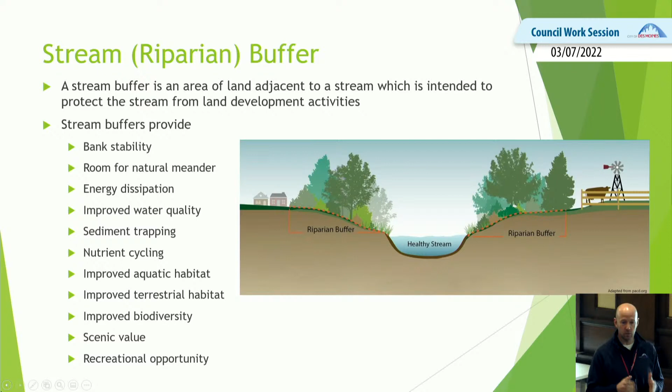So the first thing is, I'll just use the arrow key. So the stream buffers provide a whole host of benefits. We know that the creek is more than just where the creek currently is, because water will move over time in a way that is incredibly difficult to manage.

We have 21 miles of levees in downtown Des Moines to contain the river to where the river goes now, but that's simply not practical to do over the 200 miles of creekway that run through the rest of the city. And as water moves over time, it's going to go pretty far and wide in the space that Mother Nature has provided for it.

And that can happen not just on the big rivers, but even on the small ones too. This is an example of very carefully documented meandering of a stream on a 100-mile watershed that's smaller than 4 Mile Creek. So even over the course of a couple decades, a stream as small as 4 Mile Creek will move quite substantially over time.

You see the oldest date there is 1924. We've got a lot of development in Des Moines that is older than 1924 and would expect to see this much meandering, if not more, on even some of our medium-sized streams.

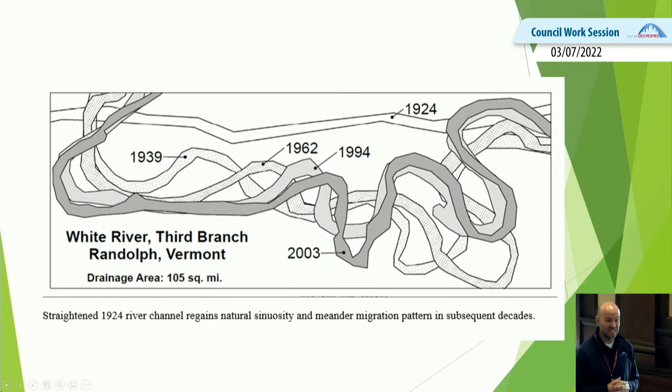So the idea of the buffer is to limit what can happen when that water moves. If you have a stream out in the middle of nowhere, it's like the tree falling in the woods—does anyone hear it? We don't really care quite as much, except when our yards start backing up to those properties and we start seeing instabilities develop, and erosion continues.

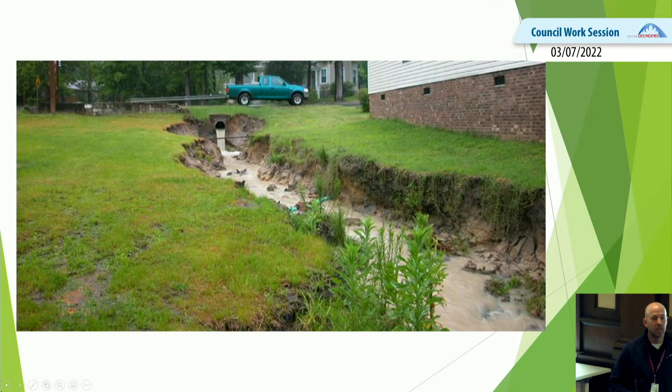Anytime you see a 1 foot or more sheer face of earth next to a body of water, it's going to get bigger. That's an instability, and erosion and natural processes will continue to erode that away.

Is that picture of the city of Des Moines? No, that was from North Carolina. All right, just example pictures. This one is not either, thankfully.

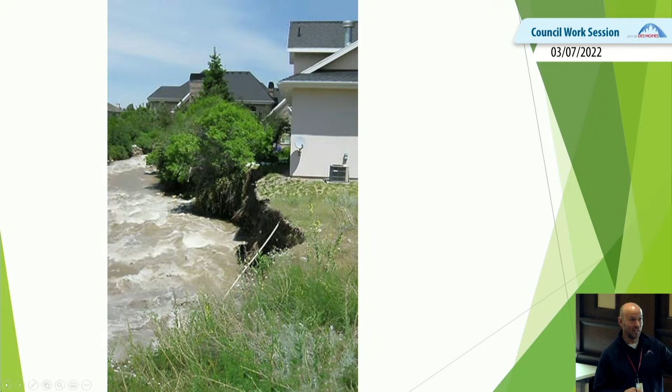But when you've got that much water and that much instability right next to a house, you've got a big problem. So this is going to take some real engineering to fix that one there.

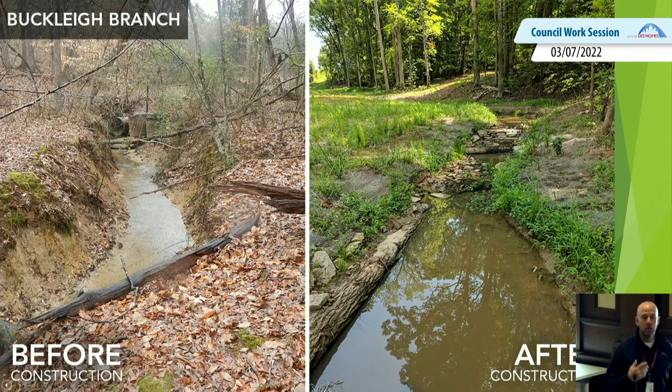But not only do you start impacting properties, but when you started pushing properties and land development activities closer to the creek, you start limiting your options for stream bank stabilization. So here I mentioned the 1 foot or more sheer cliffs next to a waterway is a bad idea.

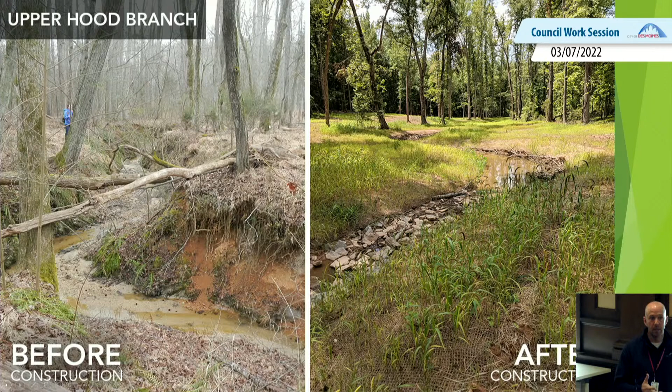As you lay that out and stabilize it, you create more space for the water to safely make its way down and stop eroding and delivering sediment. But when you have land development activities closer to these waterways, you severely limit the options available for stream bank stabilization.

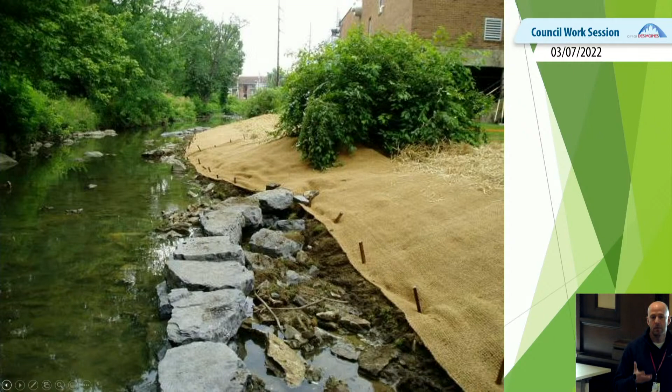That tends to increase the cost or just make it very difficult. So we want to preserve that space in future developments to help prevent some of the worst problems and preserve the toolkit available to the private property owner, to keep their property safe and enjoyable, because a lot of this is easily foreseeable if the engineering is done properly at the very front end of development.

We also want to keep... these are all again examples. There are examples like this in some of the western suburbs, in Clive and elsewhere. These are just examples.

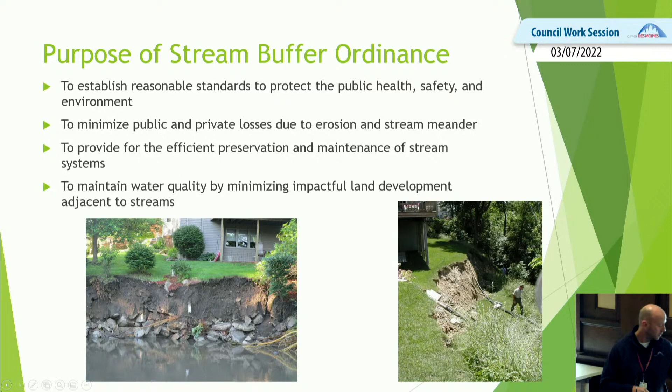So there are existing stream buffer ordinances across the metro. This was not part of the Capital Crossroads Stormwater Management Ordinance that we brought to you all for approval back in November. That's now in effect. There was not consensus at the time to fold this in, partly because there are multiple existing stream buffers and they don't all agree with each other.

So the Walnut Creek WMA member communities undertook this as a separate follow-up activity. We're a member of that WMA, so we wanted to participate and then bring this back for separate consideration later.

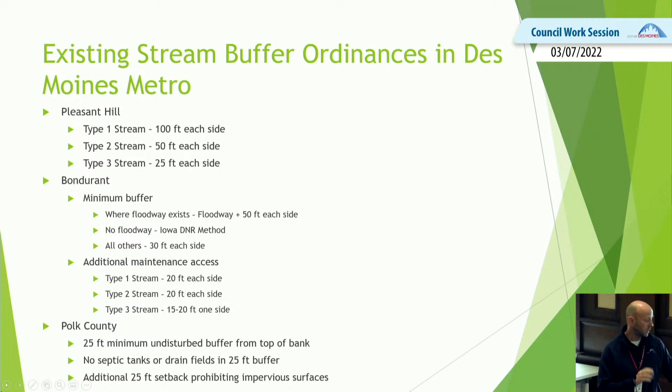So you see multiple references to type 1, type 2, type 3, and the buffer sizes that go with it. Basically, the bigger the stream, the bigger the buffer. There's different ways that buffer is calculated depending on where you live, and what is permissible differs based on the size of the stream in the existing stream buffer ordinances.

Maintenance access—could you describe a little bit about what that entails? For Bondurant, in the second bullet, additional maintenance access.

The maintenance access would be—what's prohibited in the stream buffer is land development activities, which is a more stringent standard than floodplain management. Floodplain regulation basically limits inhabitable structures, so you can build a shed in the creekway, but a maintenance access would make that accessible beyond just the bare minimum of the buffer—accessible to a vehicle or a person walking. So it would preclude the placement of a structure or an object that would make maintenance impossible or more difficult.

I have a question. In some of the pictures you showed, the before and after, there was reconstruction of the banks and everything like that. So would a stream buffer ordinance include us doing that work, or is it just saying we're not going to build?

Not necessarily. The stream buffer ordinance would prohibit land development activity within the buffer. Part of the problem with encroachment into that is it makes stream bank stabilization more difficult to do and limits your options. So it's showing examples of before and afters of unstable banks, and oftentimes you get things right up against a creek bed, and we have sheds and garages where the cliff face keeps eroding in.

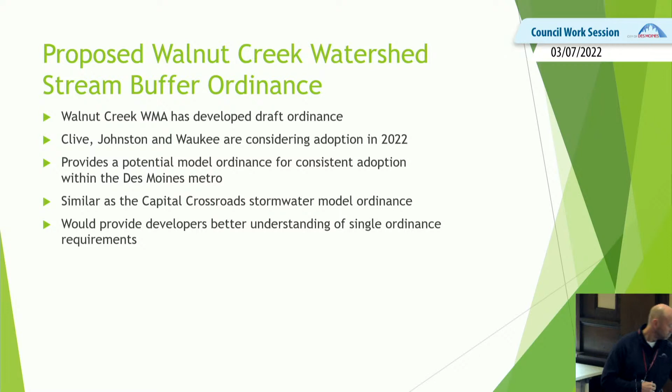So what we're proposing is 3 different kinds of buffers based on the size of the stream, which is driven by the size of the watershed and its contributory area. The type 1 stream is what we're all familiar with.

That's our 4 Mile Creek, Walnut Creek, Middle Creek of the North River along the south side, Frank Creek coming away from the airport. These are your larger waterways that have a defined floodway and are mapped by FEMA on the flood insurance rate maps. The next level up is the type 2.

So those are the ones that show up on the USGS map. The last layer, type 3, starts at 50-acre watersheds or larger at the top of a watershed, and I'll show you an example of cases where a 40-acre parcel at the top of a watershed with no throughput will not have a stream buffer apply to it. So 50 acres or larger, based on our analysis of aerial and topo maps.

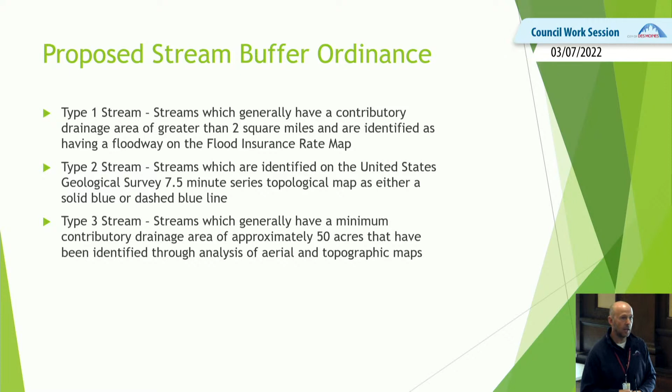Yeader Creek across the south side is a type 2 stream, and there's a whole bunch of type 2 out there. There's 200 miles of creekway inside the city that using the type 1, 2, and 3 method would only apply to 100 miles of those. So half of the waterways are smaller than type 3 and would not have any stream buffers apply to them.

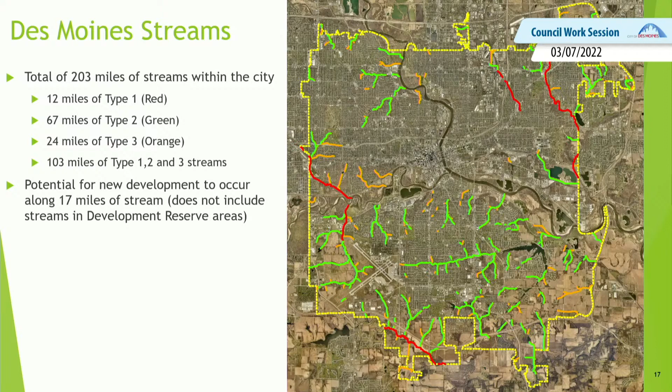Not including the development reserve in the southeast corner of town, there's 17 miles of stream bank that are currently undeveloped, and this would apply from day one at the point of initial land development, were this to be adopted. What about existing homes that are already in the buffer? What are we going to do with those?

What are we going to do with those? Well, this would not apply to streams or current activity that's already been done, so it would only apply to new land development activities. For the most part, that's going to be trying to build a pool or a new garage or a new shed, that would be limited. If there's a legal non-conforming use, that would continue to be allowed in the stream buffer.

So that first layer defines that the area to be protected is the floodway, not the whole floodplain, just the floodway. That's the flat part of the creek, the creek bed adjacent to the creek itself, plus another 50 feet.

And land development activities inside that, that is kind of a common sense understanding of where you absolutely don't want to put something. That's the flat ground right next to the creek where all the meander takes place, so you really don't want to put anything there.

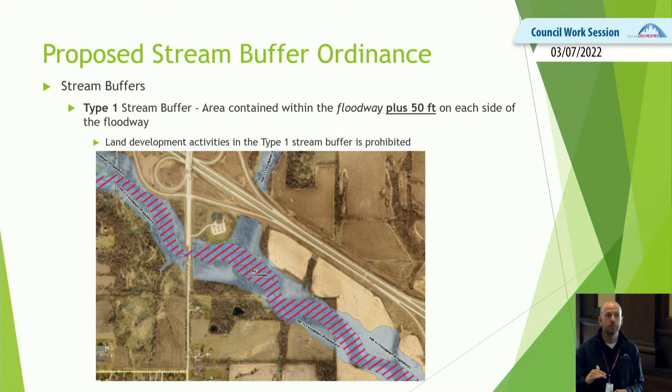This would prohibit any land development activity, which would include clearing and grubbing and cutting down trees and turning it into turf. So we want to preserve that in the most natural state possible.

You'll see here, the floodway is that flat part, as I said, next to the stream channel. So you can currently—

the Chapter 50 floodplain ordinance limits development inside that 1% annual chance floodplain. The floodplain includes the banks. The stream buffer does not necessarily include the banks because it's measured 50 feet out, so it will go up the slope depending on how steep your slope is, 50 feet beyond the floodway.

This is different from, but layered on top of, the Chapter 50 ordinance for floodplain development, because that's a vertical limitation from the 1% annual floodplain, whereas the stream buffer is a 50-foot lateral beyond the floodway. This helps preserve those banks and keep them stable so they can resist the erosive effects of the meandering stream inside that area.

And this is limited to just a few of those red streams shown on the map there, which is 4 Mile Creek, Frink Creek, which is largely undeveloped, Middle Creek of the North River way south, and interestingly, the 7th Ward ditch as it turns into the Leetown Creekway box culvert and then opens back up, running through the east side of town.

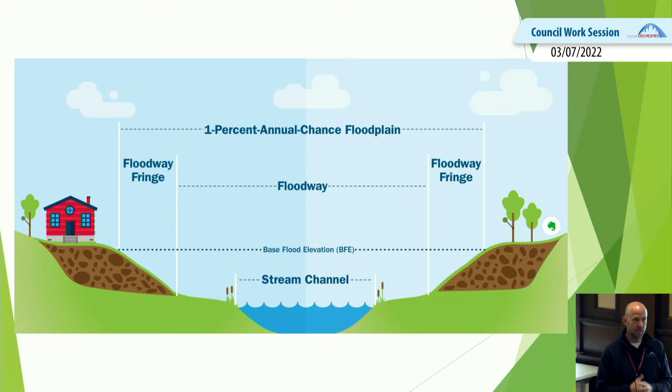Can you explain the floodplain, the vertical, what you said? The 1% annual chance floodplain has an existing limitation for development of inhabitable structures and other things based on vertical elevation. The finished floor of a building must be at a certain height above the base flood elevation, the dotted line shown there.

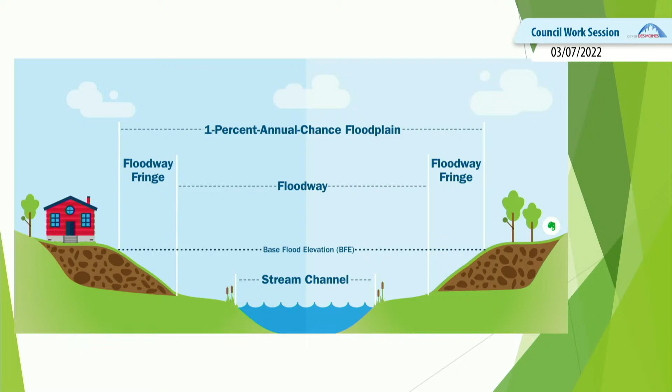That tends to get you further away, depending on the topography. This would set a hard 50-foot buffer from the floodway, the white line of the floodway, stretching out horizontally. So the two would work together to keep land development sufficiently high to protect it from floodwater, and sufficiently far away to protect the vegetated natural state of the creek bank and adjacent areas.

Okay, that makes sense, thank you. So we're taking 50 more feet from the floodway line? I'll show you what that looks like in most cases. In almost every case that's a one-to-one, there's an overlap - the floodplain is larger than the 50 feet. It's not the furthest white line, it's the inside white line. So this is already 50 feet here, in most cases, yes. We'll have some example maps to see what that looks like.

But it does further restrict what can happen inside that 50-foot buffer, inside or adjacent to the floodway itself, by preventing all land development activity. Some of that is permitted now under the floodplain ordinance, as long as the finished floor of your occupied structure is high enough. We presently permit a lot more activities in that riparian space than a stream buffer ordinance would. This really fences off from future land development activity anything in that buffer space.

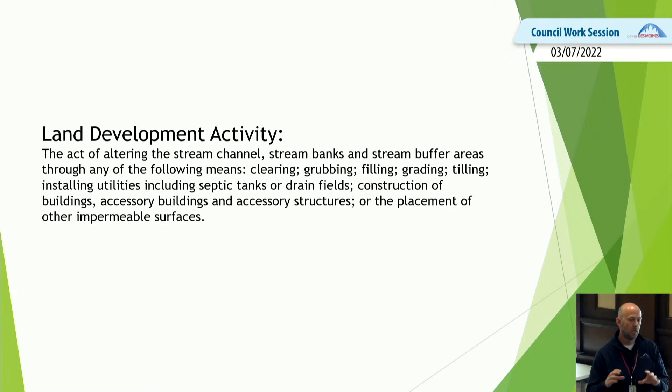So on the smaller streams where there's not FEMA flood maps, we have to start drawing lines on the map and using the meandering of the stream to try to define a belt, and we'll add a 50-foot buffer beyond where the creek is already meandering. This is less of a hammerlock on land development activity - it's just limited to the maximum extent practicable, giving some flexibility to the permitting team to consider the unique circumstances of every individual situation.

This is a smaller creek, though it includes up to Yeader Creek running across the south side. So you can have some substantial waterways that get substantial water that we still want to protect. This provides a way to define where that is in a defensible manner, and then fence that off from land development activity - not in a categorical exclusion, but in a way that just says let's keep it to a bare minimum.

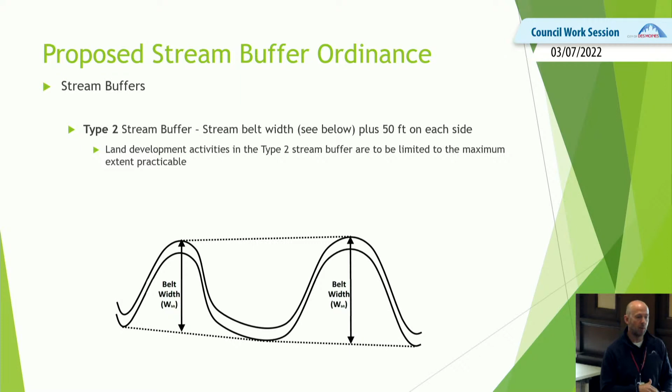And then your smallest of streams will just take the center line and a 25-foot measurement on each side, drawn on the map. This is less solid of a restriction - it's not recommended but may be permitted where the entire stormwater system is designed to be, and the key word here is stable, a stable conveyance system. That means anywhere you see 1 foot of sheer face or more, it's not stable, and we would want to try to slope that back. Using that 25 feet of buffer space preserves the ability to do that.

So it would take some actual forethought to design a system that would be permitted to encroach in this buffer space. But by and large, if you're going to get a stable conveyance system, you need that 25 feet on each side of the center line anyway.

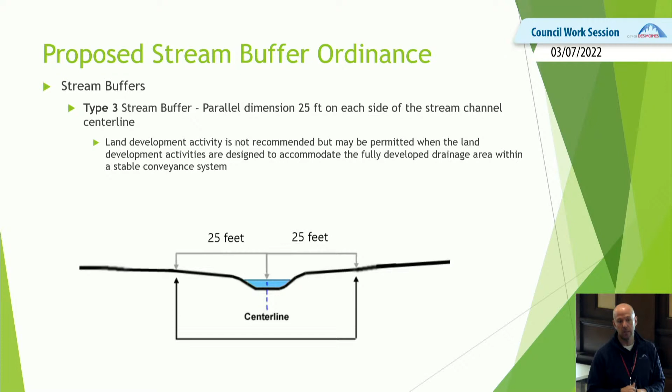So there are, like a lot of things, a whole host of what would be considered exempt activities, including a lot of repair and maintenance of existing land, construction of recreational stuff, the usual permissible things. The riparian space, especially along those type 1 streams, is excellent as a recreational resource. So we would want to permit clearing and grubbing of trees for our own and other agencies to come in and pave a trail through there. It's a great way to also use those spaces for recreation - one of the few things you can do in the floodplain that is exceptionally beneficial.

So as written, this will take a little bit of what I see as the arm wrestling of how do we customize this model ordinance to Des Moines. The model ordinance as written says the council may grant exceptions to parcels platted prior to the ordinance if the encroachment into the stream is unavoidable. We'll need to sort that out. Is that something staff can approve? Is it a P&Z, Board of Appeals approval, council approval, or do we just not want anything going on there?

The customization of the draft ordinance is all of 5 pages long, and 3 of those pages are definitions. So there's a lot of work still yet to do to make this fit and comply with everything else Des Moines would need to do were we to undertake this. But there is, even at the model ordinance stage, a way to provide exceptions especially for properties platted prior to the adoption of this ordinance.

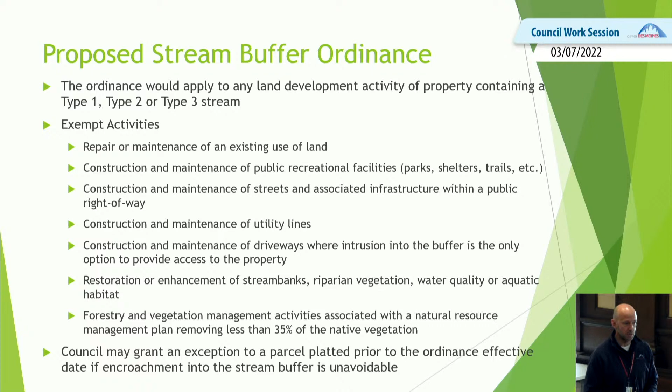How many are those? How many are we talking about? Do you know how many properties are platted already prior to this ordinance? Only 17 miles of our 200 miles remain unplatted as undeveloped.

So this would apply to the overwhelming majority of the 200 miles of creekway, though this would only apply to 100 miles. So of the 100 miles this would apply to, only 17 would be approaching this with fresh eyes. The remaining 80, 90 would need to look at what's avoidable and what's not avoidable.

And then there's a way built in, if it's unavoidable, exceptions can certainly be granted. So you're saying over 80 miles is already platted of parcels? Is that what you're saying? Yeah, and this is one of the reasons we didn't really push this in the Capital Crossroads stormwater thing, because it's not a great fit for Des Moines.

For the western suburbs that are most interested in this, like Walnut Creek, there's a lot of development going out there, and they're more motivated to preserve those buffers so they don't get the same result. There's multiple places in Clive and the western suburbs with 8-foot tall cliffs where the creek is marching closer and closer to homes. We don't have a lot of that. On the eastern side of the metro there are already 3 ordinances existing, so there was not consensus among the communities to do this at that time.

So this would not obviate the current and established practice of the city to require maintenance of the stream bed and creekway by the property owner. This is something we would still want the property owner responsible for, but by precluding land development activity in that space, we preserve their options—either for the property owner to undertake it, or we can assist through the Stormwater Rebate program, or as we did along Yeader Creek for water quality at Easter Lake purposes, undertake stream bank stabilization on their property for the collective behalf.

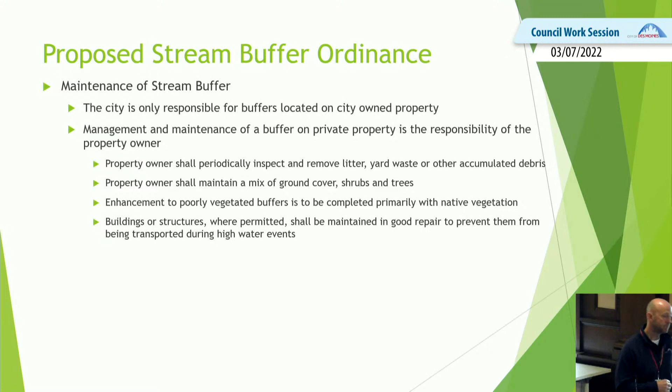So who will oversee this? It said management's up to the private owner, the homeowner. Do our inspectors go out and inspect that they've cleaned it up? Because it said they should maintain it, clean it. That would likely be enforced on a complaint basis. Typically, when we get the phone call about the creek bed taking out a garage, that's when we find out a creekway is eroding in a way that endangers people or property. But we do have the right to inspect, so that's in the next slide, a way to proactively go look at things.

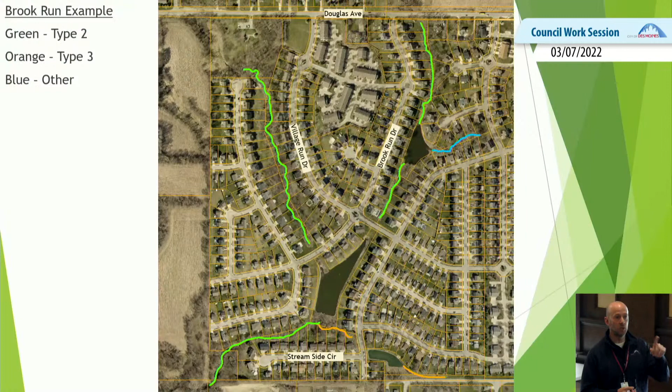I want to draw your attention to how this would apply. Let's roll the calendar back 25 years and see how this might have applied to a neighborhood with notable stormwater concerns. Brook Run has multiple type 2 and type 3 streams inside of it, and if we were to draw the 50-foot and 25-foot buffers on top of those, they would look about like that. We see 87 properties are affected by that buffer space.

And in 15 of those 87 cases, there is a house inside the buffer space, maybe a little closer than I'd like my house to be to an advancing and eroding creek. So a stream buffer ordinance applied to this neighborhood would have bumped those houses further away from the creek at the very beginning. The way to accommodate this would be at the time of platting, to flex the streets and houses around the buffer space. All you're doing is moving lines on a map inside a computer drawing program to allow the development to accommodate the future movement of that stream.

Erosion is a natural process. It will continue to progress. We want to stabilize that and minimize the advancement. Human development and activity and our uses of the land exacerbate it noticeably, but it's a natural process, and we want to allow, to the greatest extent possible, the water to go where it's going to go. That's by far the cheapest and easiest way to manage the interface of people with their water.

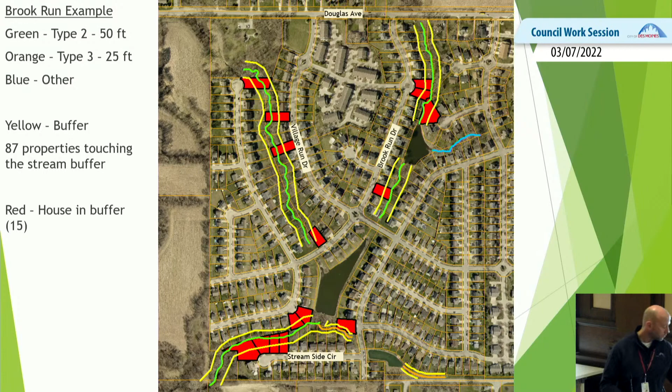To be clear, 25 years ago nobody ever imagined there would be the erosion that's there today. I clearly remember being involved in building houses, and I could walk right down, and the toddlers would just walk right out into the little stream there and get their feet wet. But with the weather changing the way it has, and the events we've had, this is a completely different picture today than it was 25 years ago.

We have had more frequent and more intense rainstorms. The average intensity is increasing and accelerating over the last 20 years. So it's not like the developer did something wrong at that time — that was the practice 25 years ago. But who pays for that today? Homeowners.

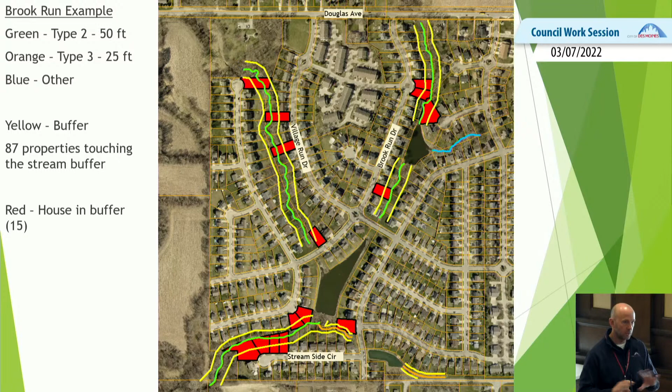All of these spots on the map, we're anticipating there could be issues there over time. Some of these have already had a substantial amount of work done. Down at the bottom of that map, about 10 to 15 years ago, there was a joint project with the city and Polk County, mostly Polk County, doing a lot of stone riprap to stabilize that creek bed at the bottom of that watershed.

We're trying to avoid a repeat of those problems in new development, and that's part of the purpose of this. As erosion goes on, what are you predicting — how long before this 50 feet on either side isn't good enough? Is it hundreds of years, or probably less? I don't know the answer to that.

It really depends on how much the stream moves, because under this definition, especially the type 2, we're using the creekway to draw that belt. So it will continue to move, and the belt will get wider. At least at the time of platting, you've got 50 feet where the meander currently is. I wouldn't expect in a generation or two that it's going to move all 50 feet.

But at the very least, you're now 50 feet - any structure or land development activity is 50 feet away from the outermost edge of that stream. You've got quite a ways to go.

So we're not worried about a natural process of erosion, and the situation has changed from what we set it as. We're saying we have that extra space, so we should be good for the lifetime of the house, basically.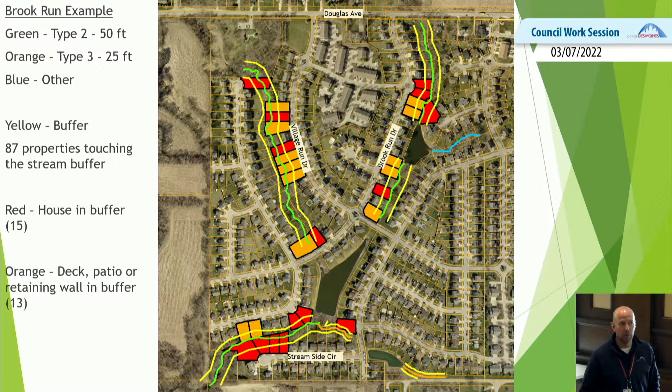So in addition to the 15 houses that are inside the buffer, there's 13 more properties that have decks, patios, or retaining walls, and these would be land development activities limited to the maximum extent practicable on these green streams. So not an outright prohibition in the buffer space - there is the possibility to use that, but we would want to limit it to the maximum extent practicable. So there are existing conflicts with homes and appurtenant structures and other uses inside that space.

So going forward, if a particular parcel like this would come in front of the city, would we be able to put that many houses now on that parcel, or would there be no way? In this space, we haven't looked at how you might flex the streets around, but you could adjust where the streets are. You might lose a couple lots out of it, but not a whole lot - these are really deep backyards.

Yeah, between Village Run Drive and Parkside Drive, I think that could have been designed differently without losing any lot. I just wondered - at the bottom of that watershed there where Streamside Circle is, and Hull, those are really short lots and really close to that stream, which is why that stream bank stabilization 10 years ago took place just a few years after the neighborhood was developed. The yard started eroding in a way that each of those homeowners kicked in $5,000 or $10,000 each to participate in stream bank stabilization with Polk County, to get it all hard armored and just hold it where it is for a generation or two.

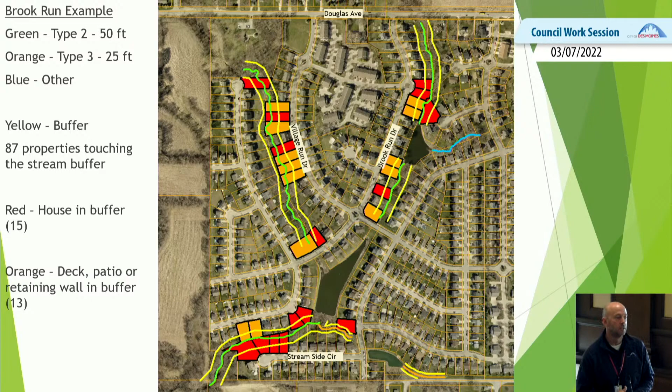Can you talk about that phrase, maximum extent practicable? Maximum extent practicable is a term that allows some flexibility beyond a flat prohibition. So in a type 2 stream, the land development activity would be prohibited to the maximum extent practicable. We're trying to keep as much out of that space as we can.

Where you'll likely see that with the greatest impact is on either redevelopment or permitting activities in an already platted neighborhood, where there's hard limits to what's possible because the property lines are there, the houses are there. We would want to preserve that space as much as we can, but not to the same level of importance as a larger stream where it's just not permitted at all.

So type 1 doesn't have that exception in there? The maximum extent practicable will be most easily applied at the greenfield development stage where it is eminently practicable to preserve that space, because all you have to do is draw boundaries on the map.

It'd be like at the design stage, just like designing around setbacks for utilities, setbacks from the road, easements, and all the other considerations that go into design. This would be just another one that provides a more healthy respect for the creekway.

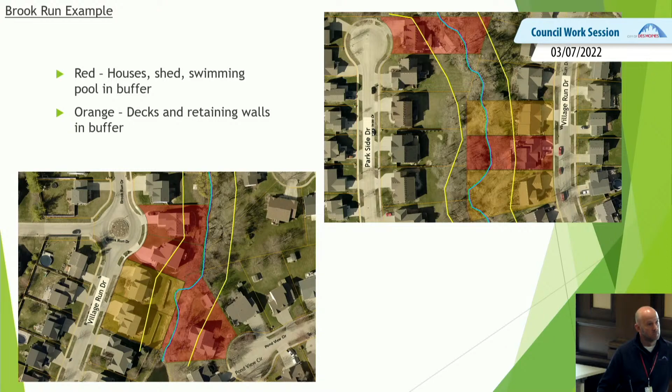Could you go back to that last slide? So are these - I mean, I know it's in this context of this particular ordinance, but when we get a really heavy rain, if we were to guess properties that are going to be impacted in the future by that heavy rain, it's probably the same properties as well, right?

Yeah, and as something designed in the 90s, got built at the end of the 90s for sizing infrastructure, and we consider this natural infrastructure - it might have been adequate in the 90s, but I don't think it will remain adequate or will offer the same level of protection in an ongoing manner in the future.

But to give those homes that are there now some reassurance, as we redevelop Douglas Avenue, we are putting in 2 storm basins that we hope will hold some of that water, at least slow it down there, and it won't be directly impacted on these homes like it has in the past. Yeah, this is another tool in the toolkit for resiliency, building storage upstream. Right.

Particularly as properties develop, but where necessary, tucking it in the middle of a watershed helps build our ability to slow down that basin's erosion and hold the water in two or three basins, on the two main stems that come through, the type 2 streams.

Plus, as an example, the work done off of 47th around Hickman and Holcomb—now that one's at the top of a watershed, not only protecting itself but also properties downstream, where we're just now, four years later, getting a bigger pipe up to it over the next year and a half. So that's building conveyance in an already developed neighborhood where we've taken the creek and put it in a pipe. Where we still have those creeks, we'd like to preserve that volume and the space to let the water fill up and go back down without eroding into people's backyards.

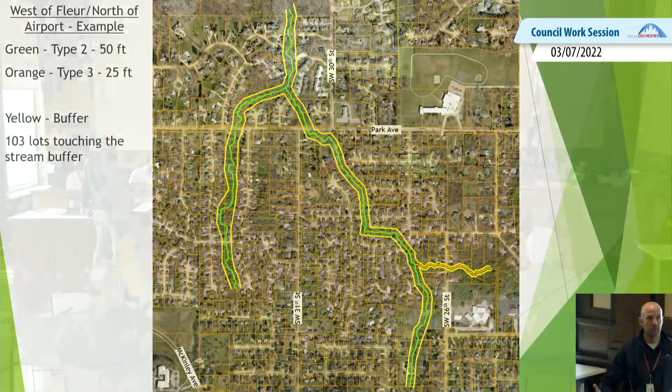So another example showing an even earlier decade of development that almost entirely disregarded the flow of the natural stream. We've got 100 lots touching the buffer, 25 of those homes are entirely in the buffer, so that's inadvisable. Another 11 properties have some sort of permitted structure inside the buffer space.

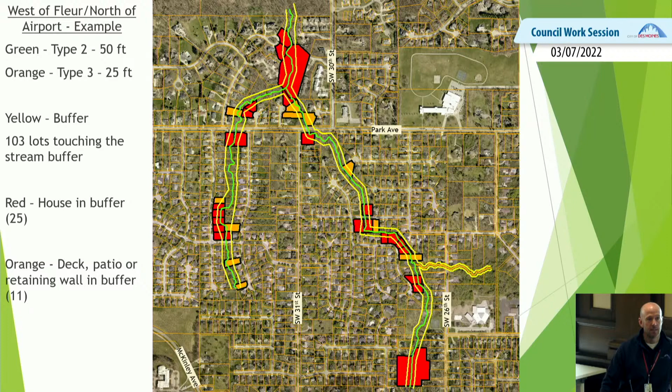Exceptions could be made to permit the driveway to be put in with a box culvert of sufficient size, instead of the couple hundred feet of pipe that looks like it's dropped in there now. But this gives the ability to let the water go where it wants to go without threatening future properties. We haven't had a whole lot of complaints in these areas, so maybe the stream is more stable.

As far as recently or to-be-developed land, this is Middle Creek of the North River, south of Highway 5. That's Fleur Drive running north and south through the center. We see type 1, type 2, and type 3 streams there.

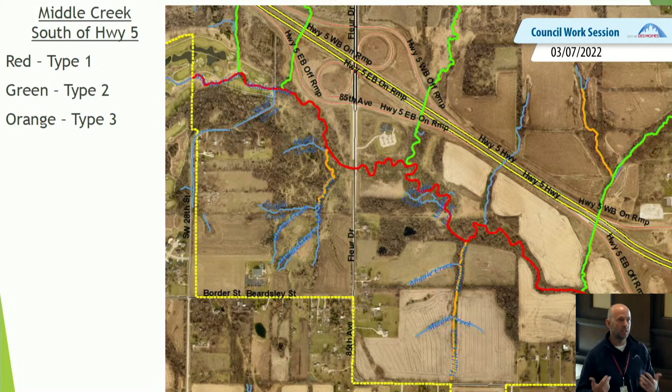What I want to draw your attention to is where you see the orange lines and the green lines, you also currently see trees. So this is where we would want the buffer to go, in already riparian space that is natural. The land around it, the flat ground, is what's being farmed, but the creekway of type 2 and type 3 creeks is not being farmed now. Were a buffer placed on top of them, it would largely be preserving existing trees and existing natural vegetation areas, and the development would cooperate around that instead of trying to make the creek fit around the development.

So you already have prohibitions on development of the highest intensity in many of these places already, and the stream buffer would cooperate with existing floodplain regulations in a way that helps preserve the banks and keep them naturally vegetated and therefore more stable and able to resist the meandering of those waterways into the future.

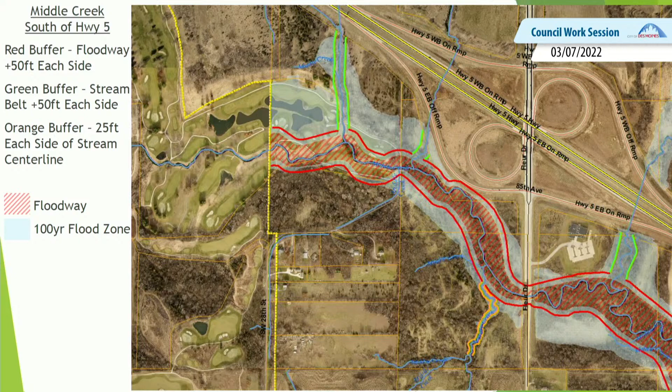So we're not adding on another 50 feet. It's almost entirely contained within the existing 100-year floodplain. And, yeah, just zooming in a little closer to see what that would look like in some of those places there.

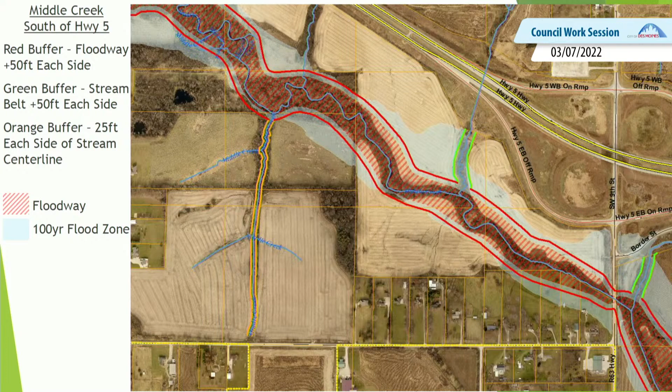So the next steps would be to solicit feedback from you all if you have thoughts about this concept or the specifics of how exceptions might apply. We are still arm wrestling amongst city departments what that language would look like. We have a finished product from the Walnut Creek WMA. We did help write it, but there's a lot to deconflict with existing ordinances and other approval processes.

And at what level different things get approved at is still to be determined. Subject to any questions, that's all I have. Anybody have anything? I guess I'm just wondering how we feel about the exception piece and who should be determining that.

Should it be just a straight council exception? Should it go through someone before it gets to council and needs to be appealed? I think the expertise is with staff. Obviously, if we can't agree upon it with staff, and there's some other kinds of circumstances, then I would think they would have an opportunity maybe to come to us at that point, but I think staff is the expert in it. I mean, I'm far from an expert to say where someone can build their house and where they can't. Well, and where does it, under what circumstance does it go to zoning board of adjustment, or does it come through P and Z and then end up on our table to say yea or nay, or I mean, I think that may be what.

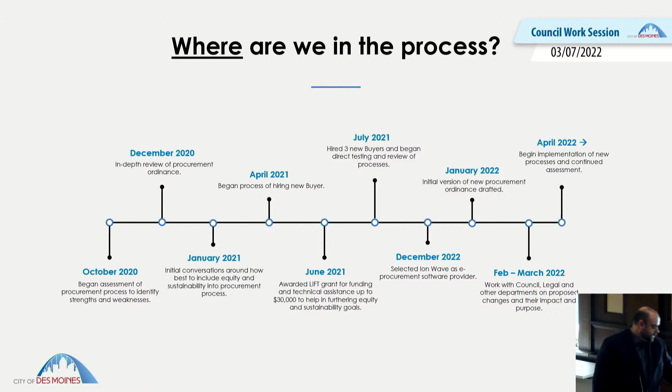So what did the review of the procurement ordinance tell us? Essentially, I found 3 key areas that needed improvement. This will be broken down as efficiency, controls, and goals. And the next 3 slides will cover that in detail.

First, operational efficiency and best practice. As Scott mentioned, right now the procurement process is effectively captured exclusively in the ordinance. Now, an ordinance is a legal document written in legal language with terms that sometimes aren't the easiest to understand. So the intention overall is to break apart the ordinance with the legal framework that surrounds the procurement process, and separate out the detailed processes into a manual which can be written in more understandable and straightforward terms and be more adaptable as situations change.

We need to be flexible. As an extreme example, the way procurement happened in the past couple of years with the COVID-19 pandemic was an extreme change from what you'd traditionally see. Supply lines changed, the availability of products changed, and so on. So having the ability to separate the legal framework for how we conduct procurement from the detailed process would allow us greater flexibility to respond to situations like that, and to generally changing environments.

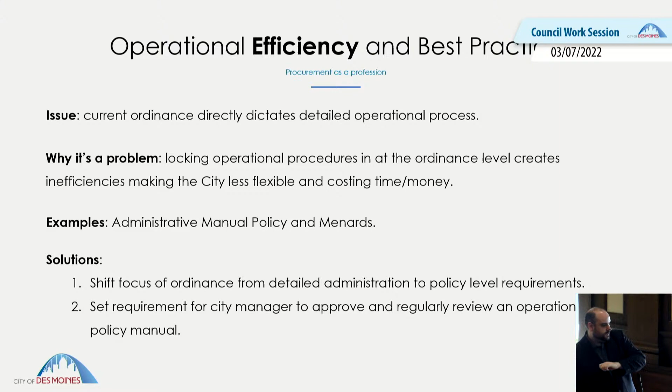The second point is controls ensuring citywide cohesion. Part of the problem is that the language in the ordinance, and the way it's written, allows for interpretation on some things where interpretation shouldn't be allowed.

The example I give here is that it uses the phrase 'cost to the city.' We can use that phrase to say that some funds, depending on their source, aren't an actual cost to the city. So generally what happens is, let's say we go out and apply for a federal grant. Part of that federal grant is a requirement that we have procurement processes in place to control how that money is spent—it requires us to have a formal process of going out for bids, soliciting quotes, whatever it might be. But on the back end, we then say within the ordinance that the cost to the city doesn't include those federal funds because they're federal funds—they come from an outside source. So then we loop that purchase out of the procurement process, which was required to originally get those federal funds.

So it creates a cyclical catch-22 of logic, in which we need this process to get those funds, and then we can ignore that process once we have those funds—which creates a handful of potential pitfalls and problems.